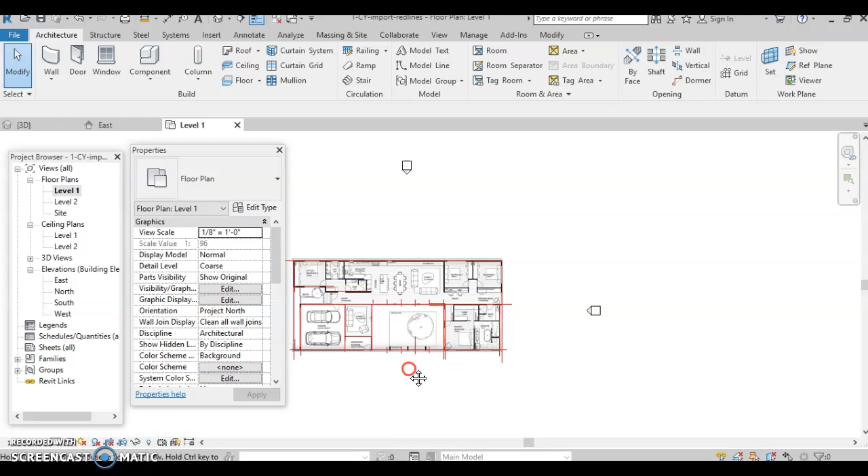Let's first import the wall. I've already done it off to the side, but I'm going to do it again and push this one off to the side. You have a blank screen. Make sure you open up a file that already has established your line hierarchy and the red line, so you don't have to redo that. But just in case you've forgotten it, you can just recompose it. It's not a big deal.

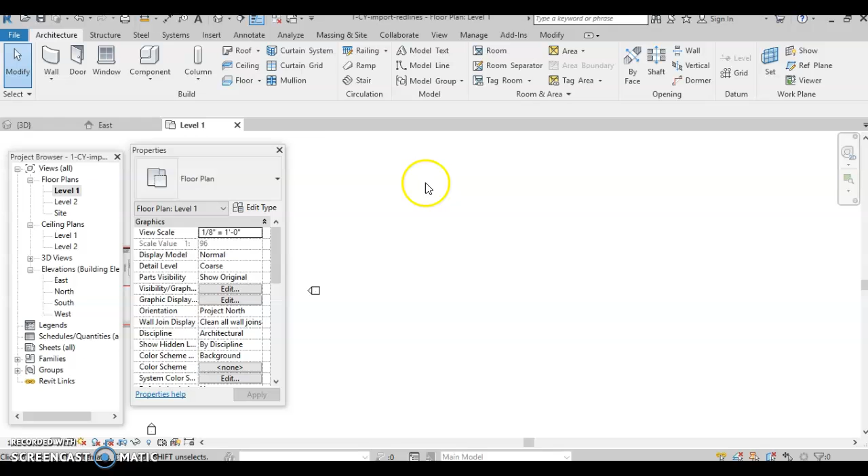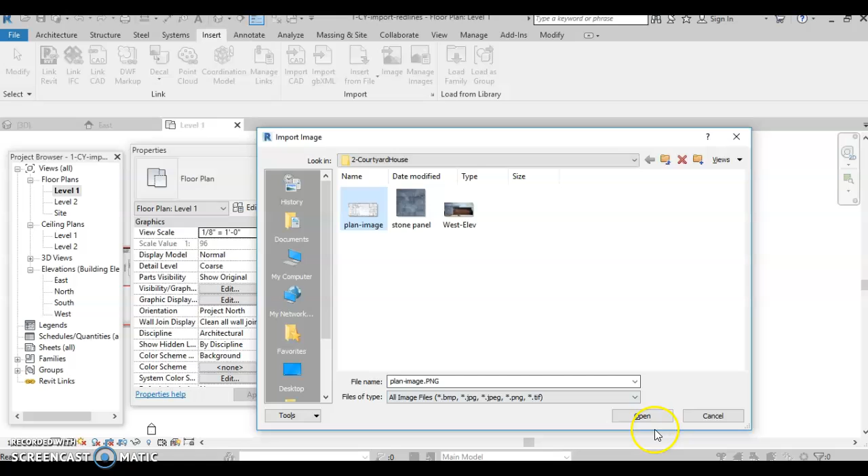So what I like to do is go over here, and it has Insert. You look for image and click on it. It allows you to go to a folder that you've already made. I've already created this image by cutting it and giving it a name. So I did it here. I open it, and when I bring it in, it comes in as an X.

I can snap it like that. I can enlarge it. From here to here is currently 98, and I want it to be 120. I can type in 120 as I drag it bigger. But the thing is, we don't know those dimensions.

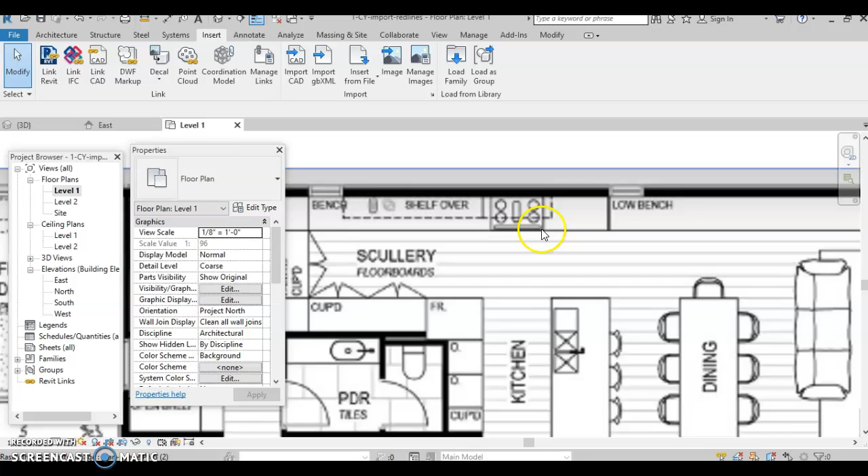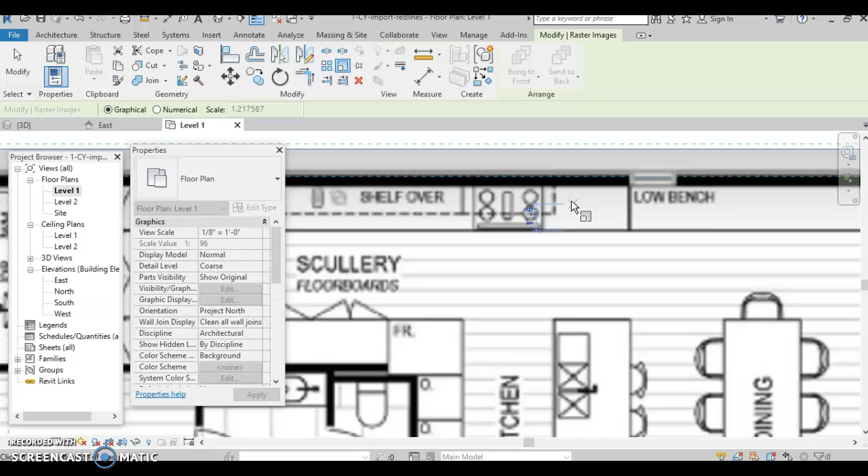What we do know is the countertop dimension. The countertop from here to here is 2 feet standard. So what I like to do is pick up the image and scale it, measuring from here to here first. It looks like it's 2 feet 6, so I go downward and type in 2 feet, because that's what I'd like it to be, so it reduces the scale.

Let's assume the project was far smaller, so I'm going to take this, which is right now 96, and make it 70 feet, so I'm going to make it a whole lot smaller. All right, so I want to again scale it.

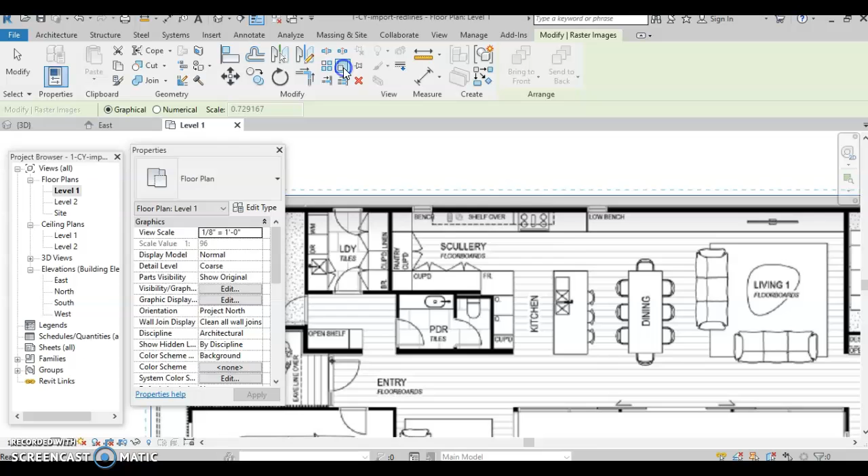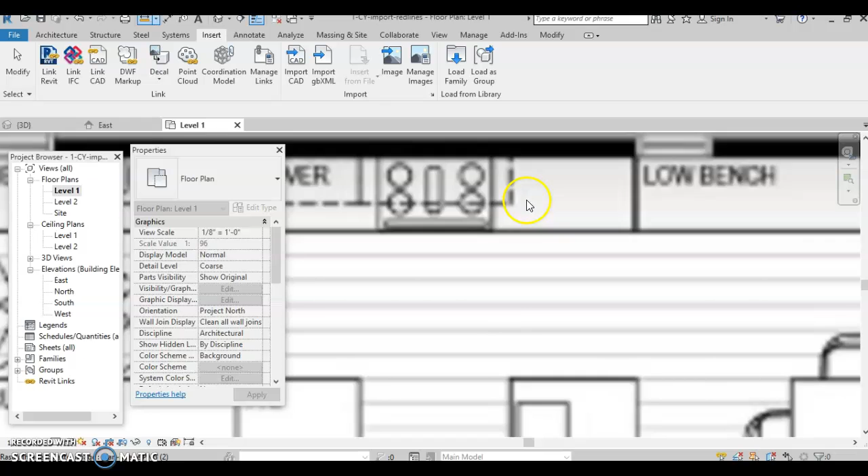So I pick the image and go to scale, measuring from here to here. It looks like it is right now 1 foot 5 inches, so I need to go bigger. I go on the other side of the line, type in 2 feet, and always check back and ask, did I really do it right from there to there? Is it 2 feet? If it's pretty close, you can leave it for now. Later on, we make it even more accurate.

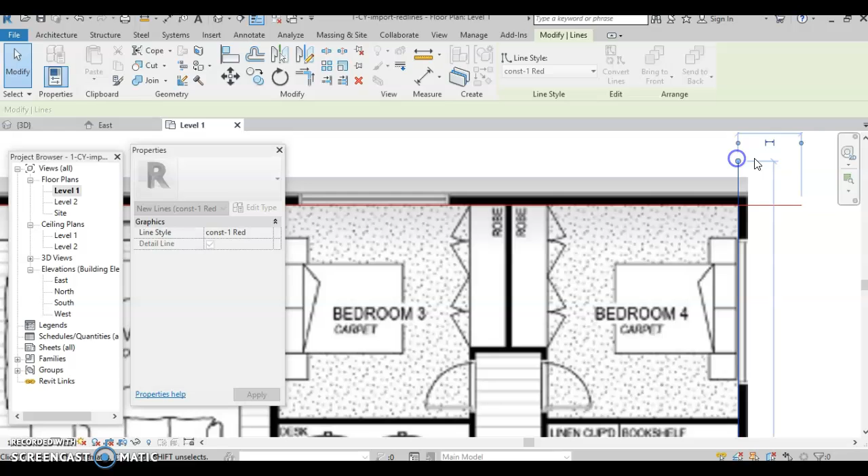Once you've actually imported the image, you'd like to go about placing your guideline design lines. You can see where I placed my design line, the red line. I'm going to pull it back so you can see it in relationship to the wall here. Do I touch the interior walls? No, I only do the exterior walls and the center core important walls like this one. And if I see some lines that aren't clear to me, I do both sides, or I do multiple.

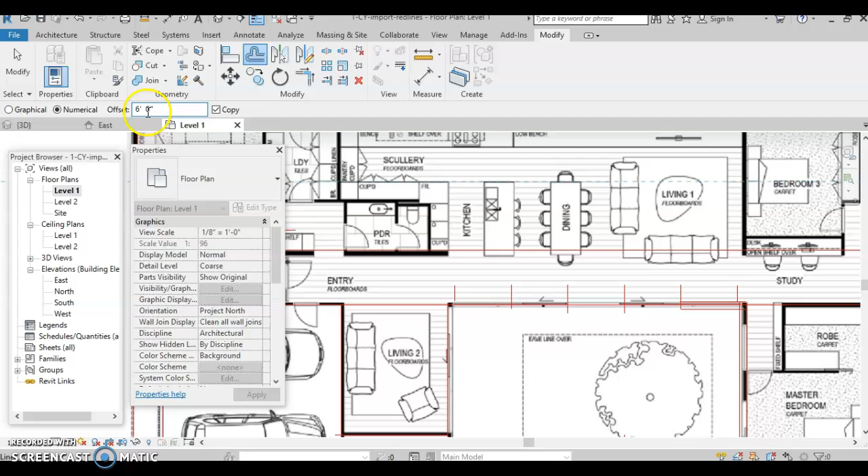For example, when I pull this out, I recognize that's not the one I really want. So I'm going to offset it 6 inches for now, just to see if that's going to give me 6 inches. It looks like it's kind of there, but no cigar. So I'm going to move both of them, pick both with Control, and move both a little bit, because even this one needs to be off a little bit. Now it looks like it's 6 inches and perfectly semi-aligned, so I'm going to leave that alone.

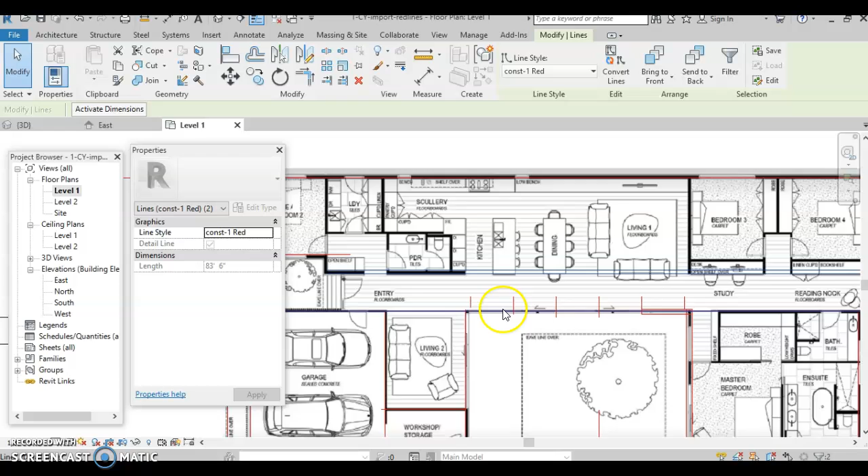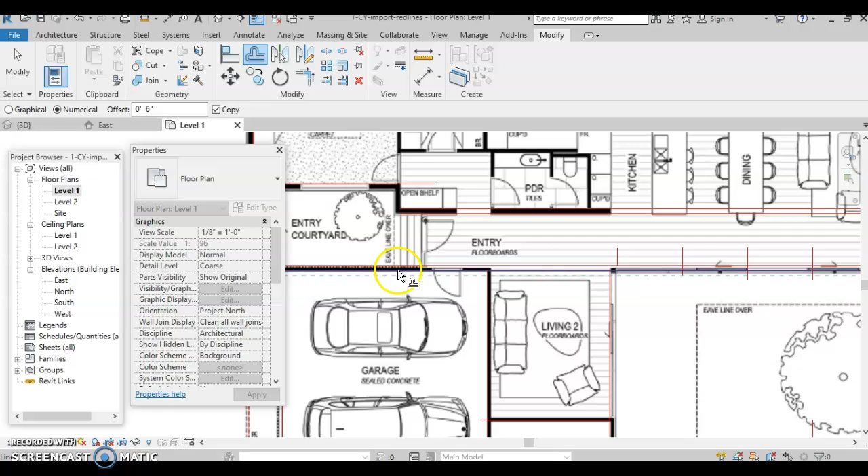That shows me my wall over here. Then you could do the same thing over here and say, well, it's aligned with the inside here, but not quite aligned here. What do I want to do? You may decide to offset it again 6 inches so you have a sense of possibility. Here you can actually see the 6 inches kind of works with this, so that's left alone. Then you see there's a little bit of offset, so you leave that one alone too.

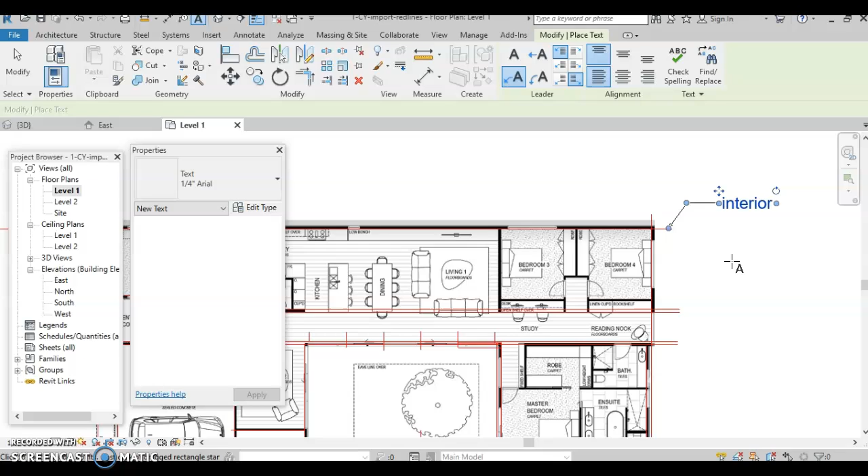But then you may decide to give yourself some notations and say, I want to note that indeed this is interior, so you type in interior. It's a reminder that that in fact is an interior line, so you don't forget it. You can put the note in every other place as well.

So it's a reminder. This is what's needed for the beginning of the class today: importing the image and placing the red lines.